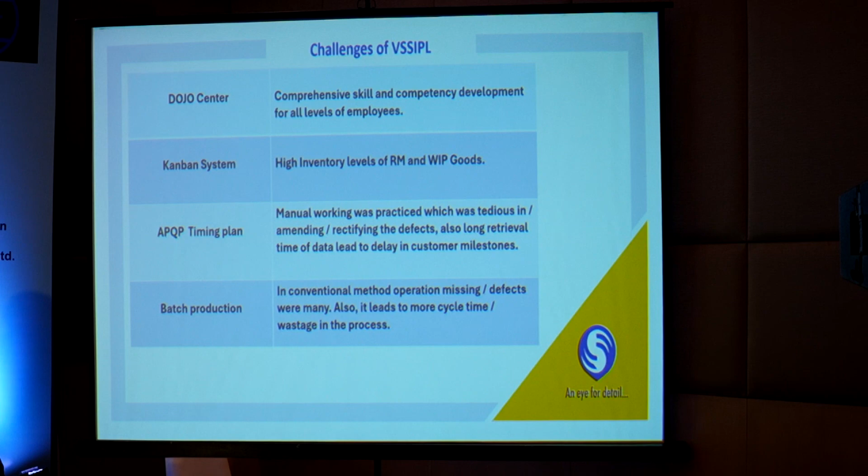Now I would like to discuss the best practices we have in Venkateswara. Before that, I would like to discuss some of the challenges we had and how the best practices helped us improve on these challenges within our factory.

The first challenge is the skill development of our employees at all levels. The next challenge is the inventory levels of raw material and work in progress goods. The third is batch production of products and accumulation of stocks at each level within our factory. And the last is the APQP timing plan, which we had been doing manually for each and every new development, and how we overcame that challenge using a different approach.

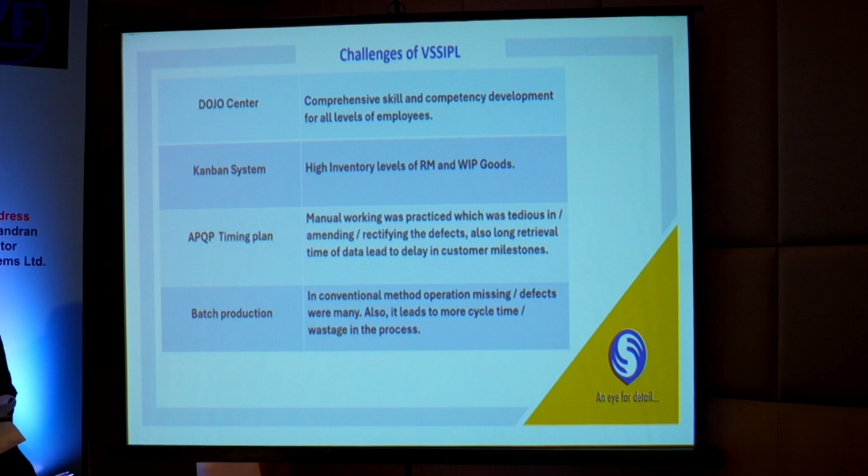So the first challenge of enhancing the skill level of our employees was tackled using the dojo center, which we implemented in our factory 2 years back, where we give comprehensive training to our employees on all levels of dojo. Majorly, we focus on 5 levels of dojo: quality, safety, 5S, production, and maintenance. This has helped us significantly upskill our employees right from when they enter the factory, ensuring all levels of skill are given to them to produce that particular part safely with quality.

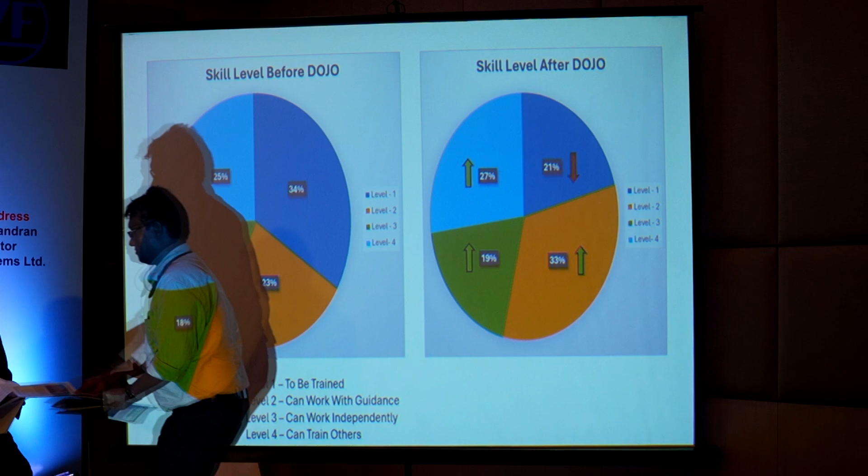Next, I would like to talk about the digitized APQP system, which we have developed in-house within Venkateswara Steels and Springs. We have our own developers who develop coding and software where we can digitally follow and track the entire APQP system, which has drastically reduced the timing of development of new projects within our factory.

Finally, the lead time for development reduced significantly, and it helped us achieve customer milestones in a very fast manner. I can share the result of this in the last few slides, because there are certain departments involved in this. After discussing them, I'll share the end result of this digitized APQP.

So the third challenge was batch production, which I have already shared. These are some of the challenges we had when producing in batch. Now we have moved towards the cell concept or lean manufacturing, where we have reduced a lot of cycle time within our products.

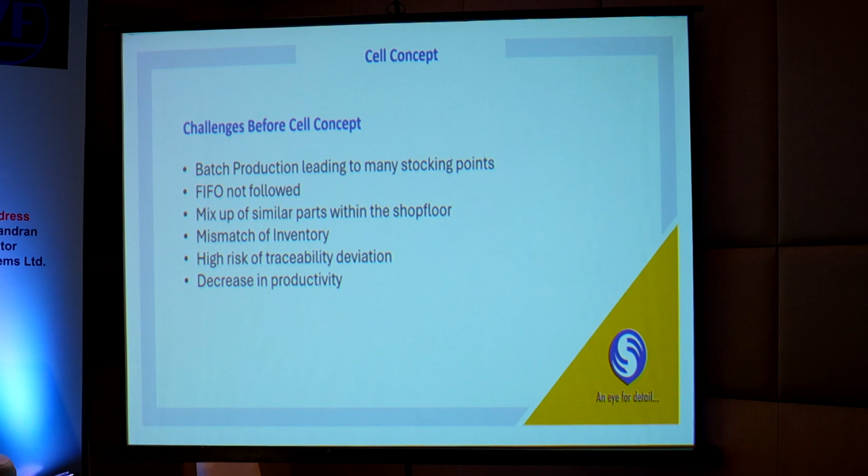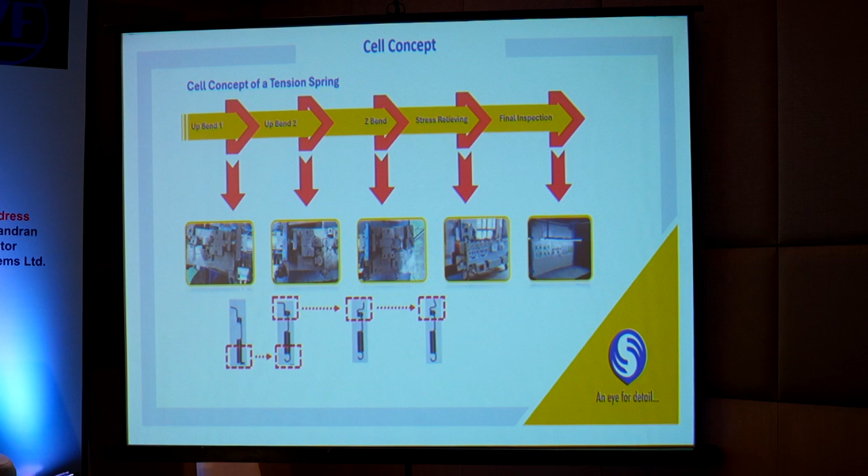All these led to less efficiency of machine utilization. But after the cell concept, here is one small example of how many operations are performed within the factory for one tension spring. These operations were changed into cell concept, and we received a lot of benefits because of that.

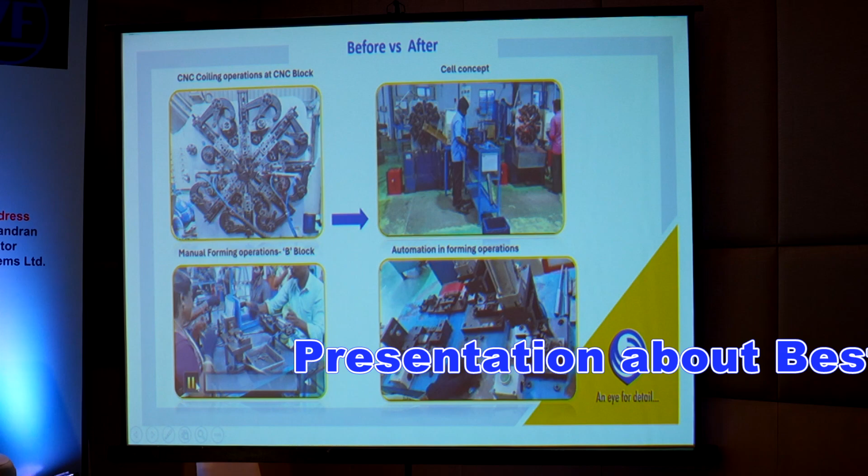A small video will be played to show you how the before and after was changed. This is four employees performing individual tasks within the factory for one single spring.

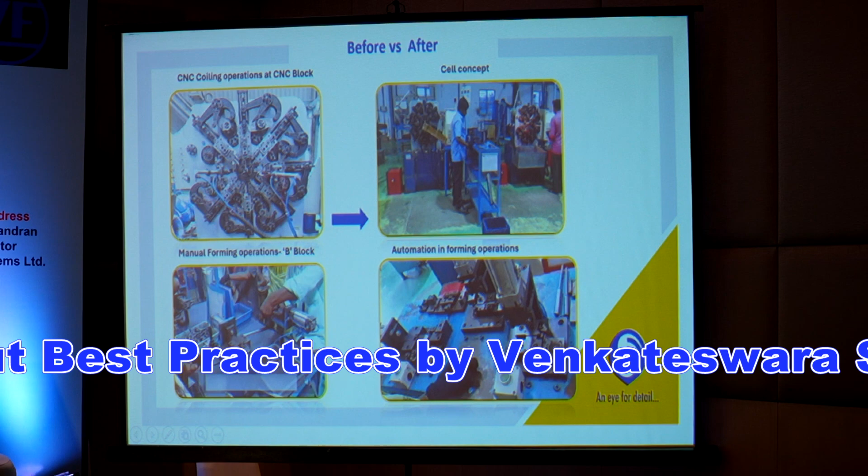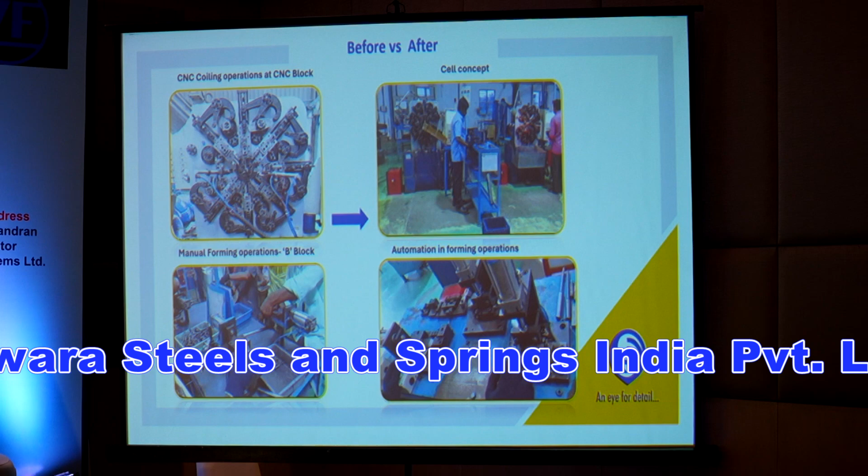In the next slide, you can see how we have improved that process. This is one single employee performing all three operations using simple automation and innovation within our factory, done by our very own team.

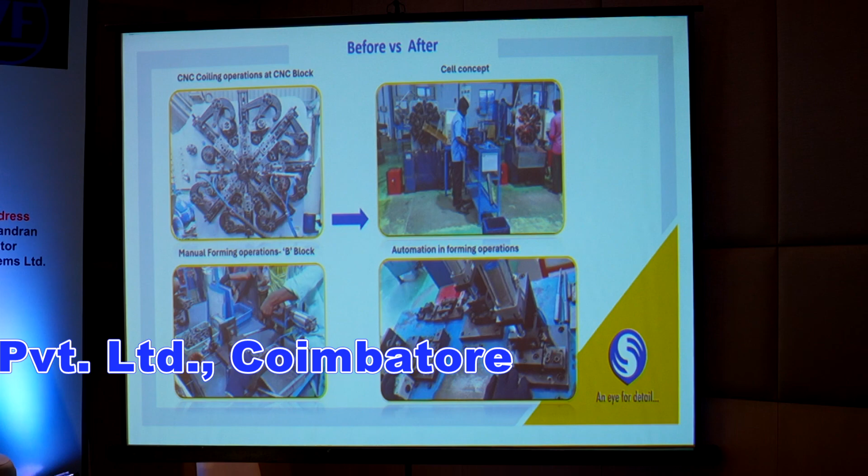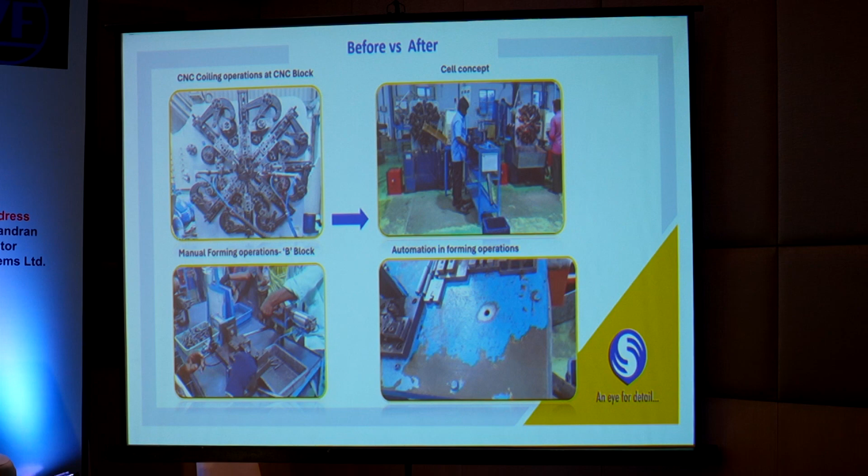And all these toolings are attached with Poka-yoke systems, where without keeping a part in each tool, the other operation cannot be performed. So at the end of the day, we ensure the product's quality is inbuilt in the process, rather than depending on final inspection systems.

And I would like to also add that we have done 30 cells within our factory, and we are reaping the benefits of them over the past 1 year.

So the major benefit of this particular concept was that we were able to free the capacity of our existing machines to add more business without investing any capital.

And secondly, we made the process operator friendly, where they are not struggling to do that process manually. The process is made more safe, more quality inbuilt, and more poka-yokes are added within the process, ensuring the operator doesn't strain to do that particular process. Finally, the operation efficiency is highly increased because of this cell concept introduction.

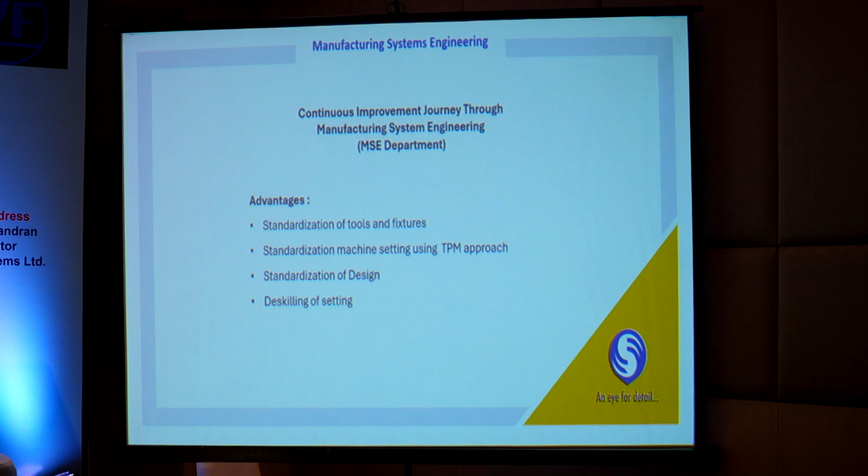To ensure that best practices are followed within the factory in a systemic way, this MSE team is working day and night within the factory to ensure all the processes and systems are standardized, so that right from the start to the end of the life cycle of the product, the process is adhered to as per the control plan given by the manufacturing systems engineering team.

Most importantly, the ownership this team has taken is very important, because we have divided 10 to 12 machines to each group within our factory. The company is divided into different groups, and each group has their own MSE teams. This team has complete expertise on that particular product which we are manufacturing.

So if the production line is suffering because of any stoppages or other external issues, this team immediately steps in and ensures that the problem is immediately solved and the line runs through without any issues, and that it must be run. They also ensure that the process of running that line is standardized and there are no further issues with that line.

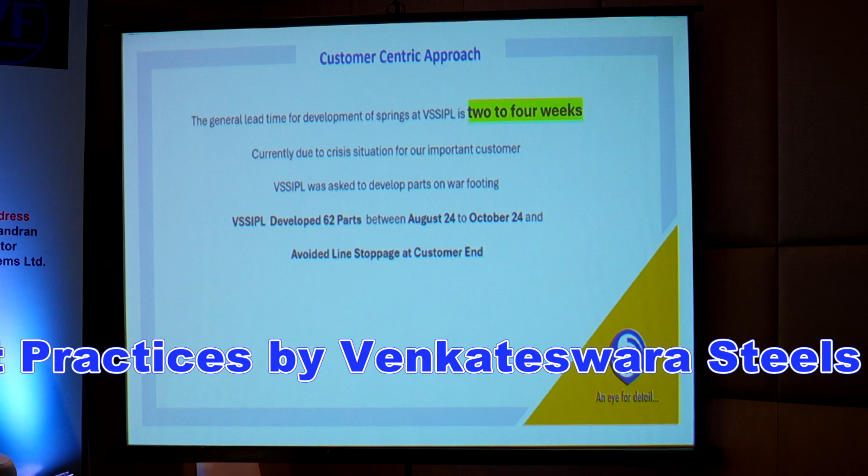The end result of all these good practices and the MSE team is one small example I wanted to share, that in the last 3 months we have developed close to 62 parts for our customers. As I shared with you on the APQP digitization, that also helped us immensely to ensure such a short lead time, and we have already commenced the process of supplying in bulk production to our end customers, ensuring there are no line stoppages because of this new part development.

Venkateswara Steels and Springs is one of the most trusted companies in the supplier base of Brakes India. We've been privileged to have the association with Venkateswara Steels and Springs since the inception of the company in 1993, and well before that with Mr. Sadagopan in his former avatars.